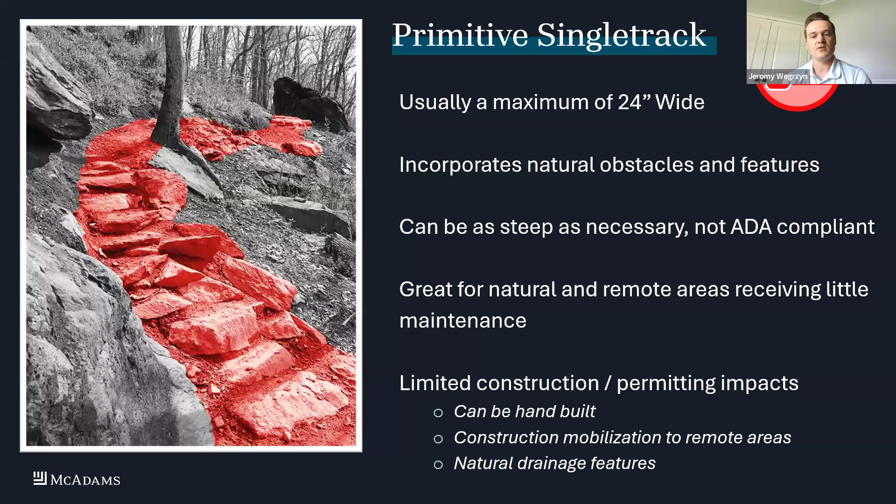So next slide. Contouring single track is our next trail type. These are a little bit wider than some of our primitive trails, about 2 to 3 feet wide and clear of most of our major natural features and obstacles on the shoulders.

You can think of this trail type as catering more towards a wider range of users, including hikers, joggers, mountain bikers, or sometimes equestrian uses. But these can still be relatively steep, with grades of up to 12% or so for some short stretches.

These trails fall into having received infrequent maintenance from groups. If they are maintained, often smaller advocacy groups are mobilized to take on that responsibility, or in large part it can be a volunteer organization. They have light construction and permitting impacts, typically using small scale grading equipment to create or maintain them. But the advantage is that they're still able to be implemented in more remote areas.

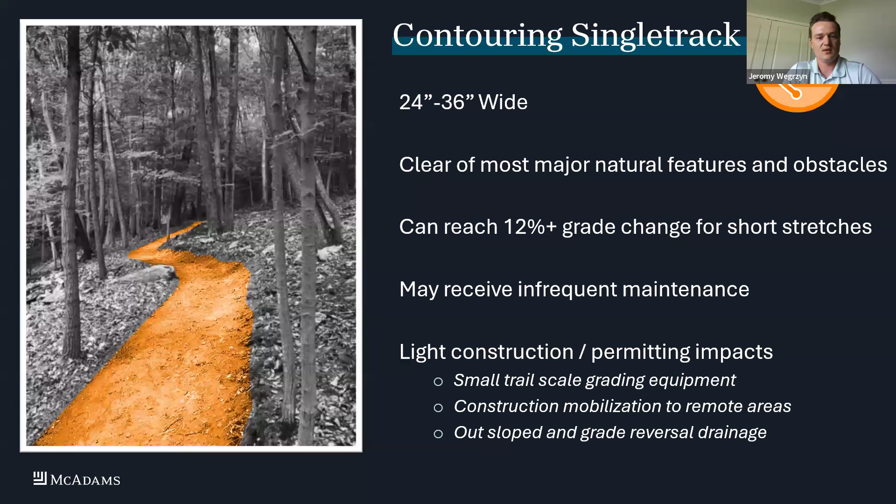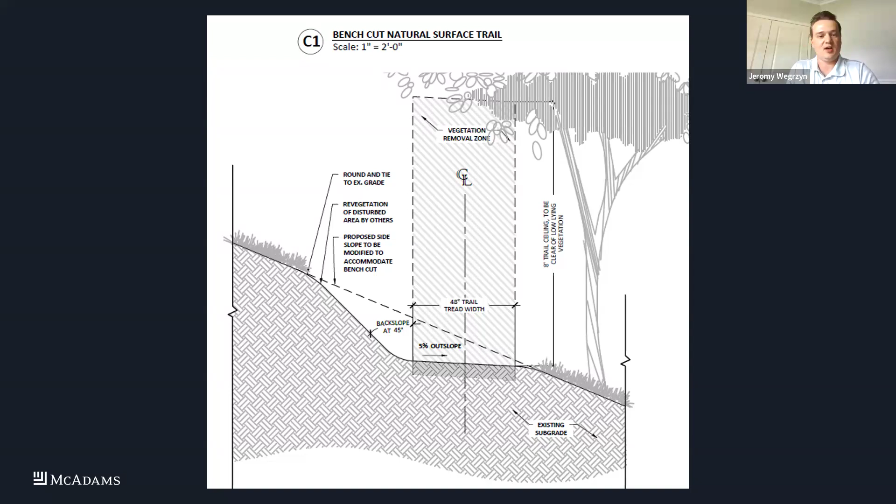This is kind of a shameless plug for one of the cross sections we did on a construction project, but it's a typical section for a natural surface trail, showing things like the trail width, the center line, and additional information such as back sloping, the proposed grade to tie into the existing grade, and notes including limits of vegetation clearing. We like to make sure vegetation is cleared along the shoulders as well as up into the tree canopy.

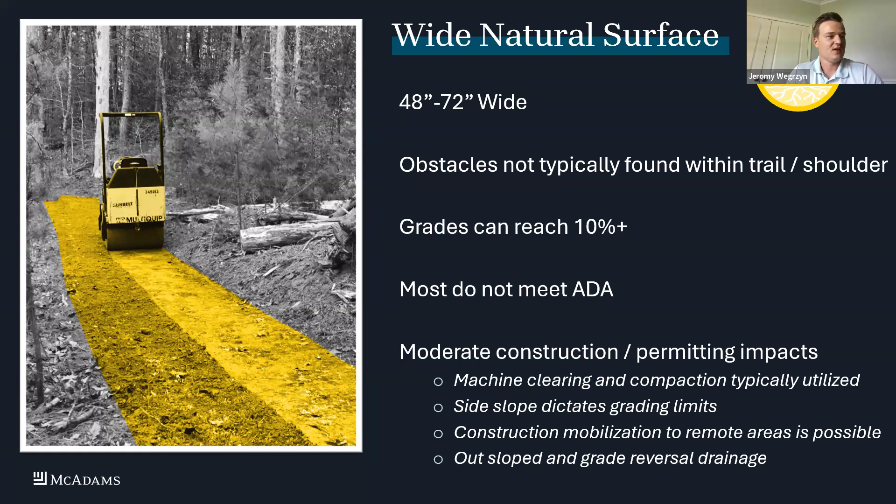Next we'll talk about wide natural surface trails. These are typically machine graded and compacted using larger equipment. They still won't meet ADA, but they'll typically have less severe grade slope than your more narrow contouring single track. You use machines to clear and compact these. The side slopes often dictate your grading limits, and construction in remote areas is possible to some degree.

Then we'll move into wide gravel surface trails. These trails are typically 4 to 8 feet wide, with a shoulder and minimal trail obstacles. They can meet ADA and many serve as a good alternative to paved greenway trails. But note they do still require suitable compaction. Materials on these trails will require additional maintenance compared to permanent pavement trails, and compared to wide natural surface trails, they're limited to less remote areas.

These are a good alternative for maybe a suburb or exurb housing development that wants to provide some sort of amenity that may have to meet ADA requirements, but they're interested in or concerned about permanent pavement impacts or cost.

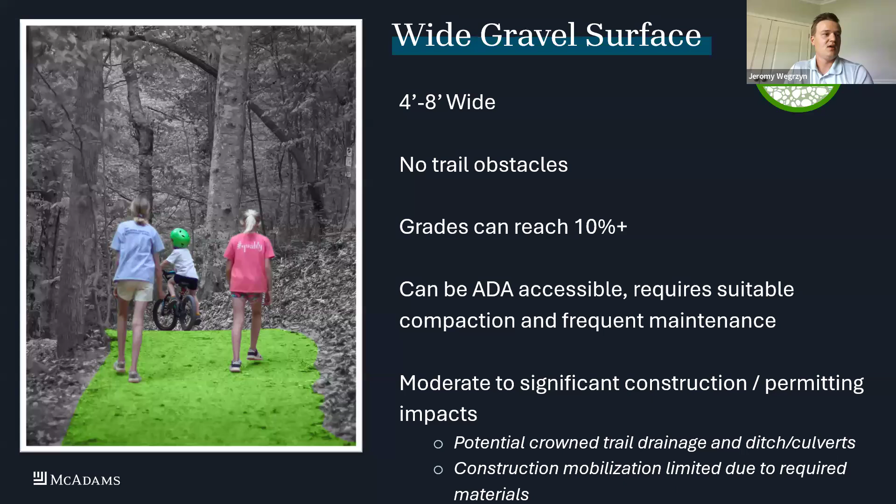This is what a typical section may look like for one of those wide gravel surface trails. You'll typically have a layer of crushed fines underlaid with a stone course, such as 57 wash stone. In this example, we have that whole thing wrapped in a geotextile fabric. This is a good design for an area that receives frequent water inundation, since the stone underneath the trail helps water drain away from the crushed fine surface.

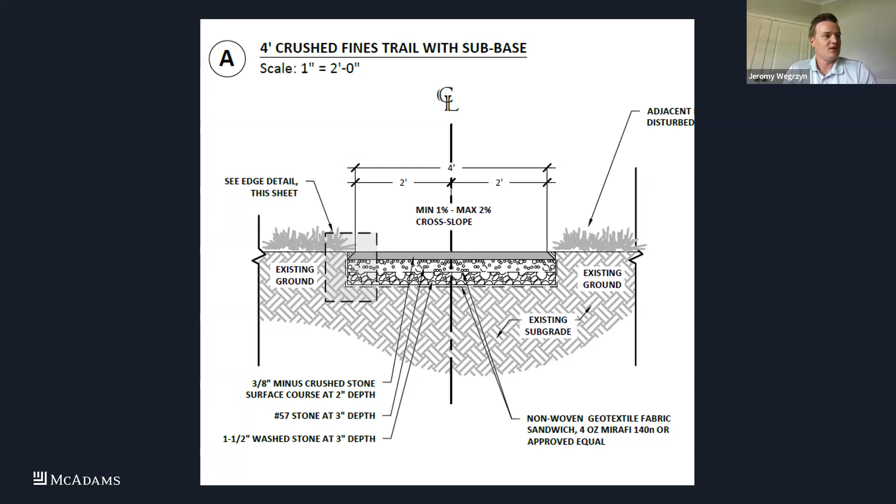Or it could look something like this, where we have a crown slope where water is draining away on either side of the trail, with 57 stone sunk underneath that crushed fine section, still wrapped in a geotextile fabric. But this section and trail type would be something you'd see in an area that's a little less prone to stormwater inundation.

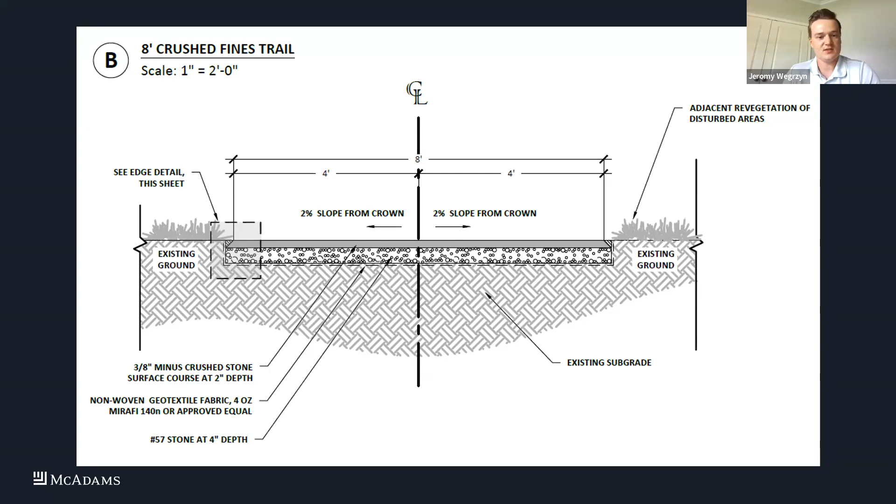So that was the first four — natural surface and wide gravel surface trails. I'd like to move into some of the next four that are commonly seen within our developed urbanized areas. But as mentioned, that's not entirely the case, and that's one of the points we'll be making later in this presentation.

The next couple we'll go over are side paths. These have significant planning, permitting, and stormwater construction impacts. As anyone who's implemented retrofitting a sidewalk will tell you, they're typically 8 to 12 feet wide, can have a buffer, and typically follow an existing or proposed roadway. They can be made of materials such as asphalt or concrete, following typical ADA compliant grades. These may necessitate a design consultant for design and permitting. Mobilization is limited due to the materials used — it's harder to get concrete or asphalt further away from a construction access point, so these trails are limited by that factor.

Large scale drainage system modifications and urban stormwater evaluations need to be done. Right-of-way acquisition may need to be looked at. Things like utility relocates and driveway replacements are common with these types of facilities.

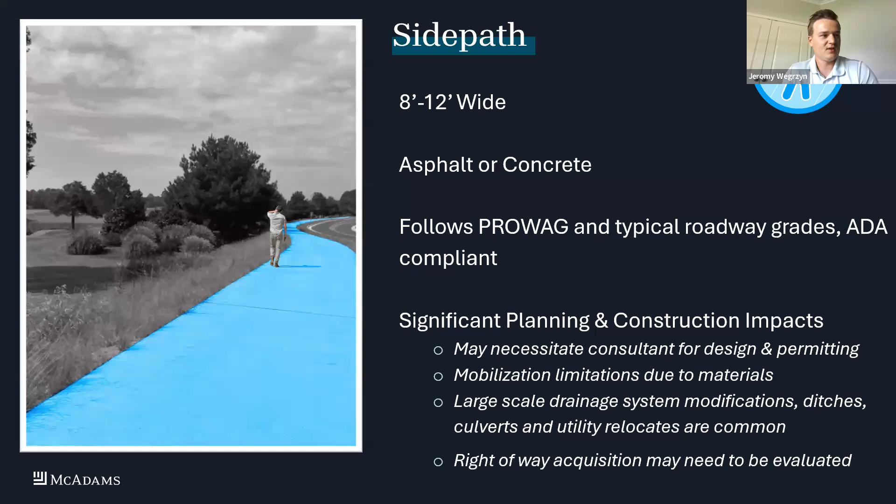Our greenway trails, since they don't typically follow roadways, can be a little bit wider. Often they're less constrained when it comes to the utility relocates and driveway replacements I just mentioned. Grading them can still be difficult, but they're also a little more forgiving than wedging a side path along an existing roadway.

Typically these will be designed with outdoor accessibility standards in mind in terms of grades. So if you've master planned these and they're located along an urbanized stream corridor, it may be beneficial to pair these with a stream restoration project to combine permitting and any floodway mapping revisions.

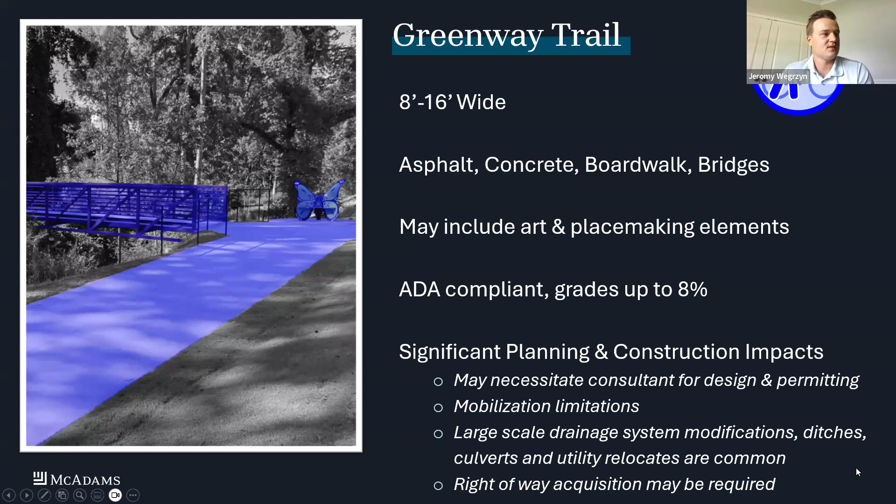As far as the section goes, we typically have a flexible pavement surface as asphalt or maybe even a concrete on top of an aggregate base course and compacted subgrade. This example shows a gravel shoulder, which might actually be beneficial for runners or gravel bikers. But the intent is to also provide some level of separation between the pavement edge and where that proposed grade is tying back down into existing grade.

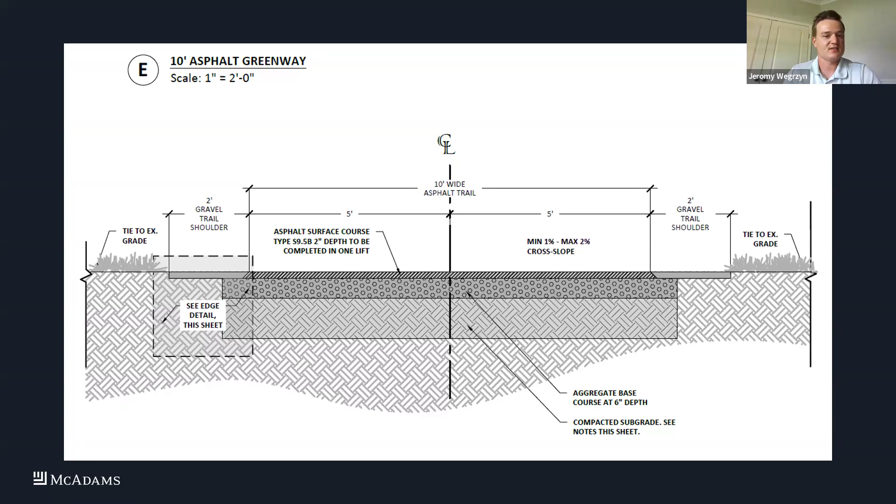All right, next slide.

So last one I'd like to cover in terms of pavement, separated bikeways and sidewalks. These can be 16 to 26 feet wide. This particular photo is taken in Charlotte. These are asphalt, concrete. They separate our modes of travel, right? So you see your bikes operating side by side, and then pedestrians either grade separated or horizontally separated.

But these typically follow streets and are subject to processes that take years and years of planning and design, and those types of considerations to fully implement.

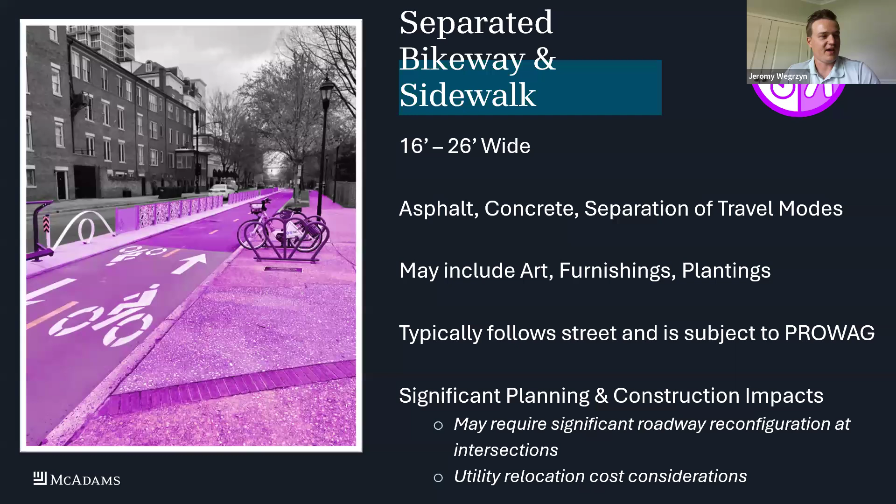But with that, I'd like to turn it back over - I guess there's a couple more slides here. So as we've kind of noted earlier, I would kind of then separate these into two different categories.

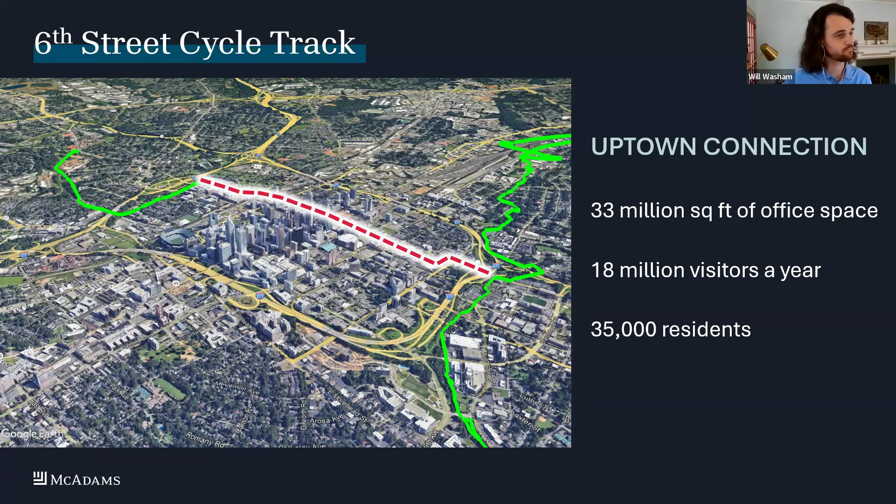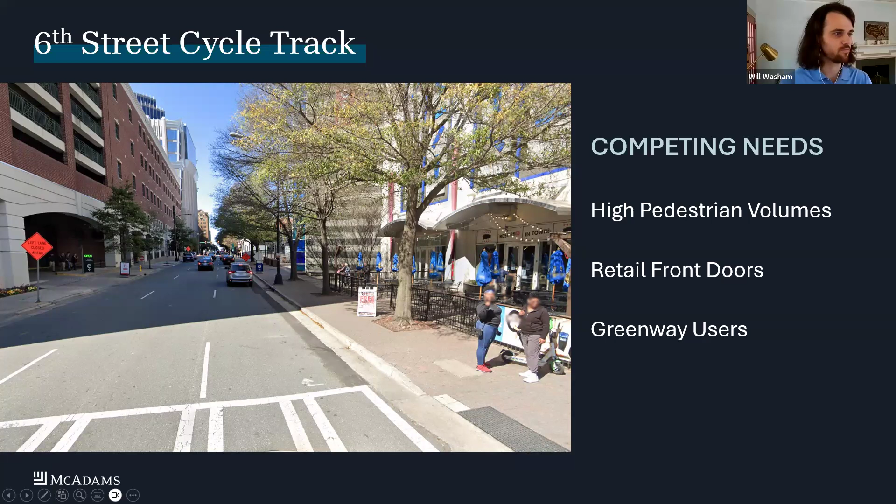Once you get into Uptown, there's a lot of competing needs. There's high pedestrian volumes, retail front doors. You've got folks coming in and out of offices, shops. So how do greenway users fit in to all these competing needs within the streetscape of Uptown Charlotte?

Definitely took some planning to figure out how we're going to get greenway users into that fabric. As I mentioned, I was with CDOT from 2018 to 2022, which was really the meat of design and construction for this project. But the planning was really done in 2016 and 2017 through the Uptown Connect study. If you're interested in urban planning, transportation, traffic planning, this was a very comprehensive study, really a groundbreaking study, I think, for North Carolina, where it evaluated all of the 35 corridors east-west across uptown Charlotte.

The study sought to figure out where we can add this greenway connector, because we'd have to take something away. We're not taking the sidewalks away because there's way too many pedestrians in uptown. It's a pedestrian-oriented development pattern. So we need to figure out where we can take some space from cars and give it to bikes to get that full trail user experience.

And so out of that study and out of all that traffic evaluation, there were 4 corridors recommended to be a network to provide greenway users connections into and through uptown, with 6th Street being the first corridor for implementation.

So when we were thinking about the design considerations for this project, we wanted to match the greenway comfort. This needed to be a fully separated facility, and we needed to have space for the high volumes of bicyclists and pedestrians. We really had to take into account traffic signal phasing. We were going to have riders going counterflow along 6th Street. It's a one-way street, so we had to look at the traffic signal phasing, and we also had to look at the turning movements. We had high volumes of cars, especially during the AM and PM peaks, turning across what would be this future cycle track.

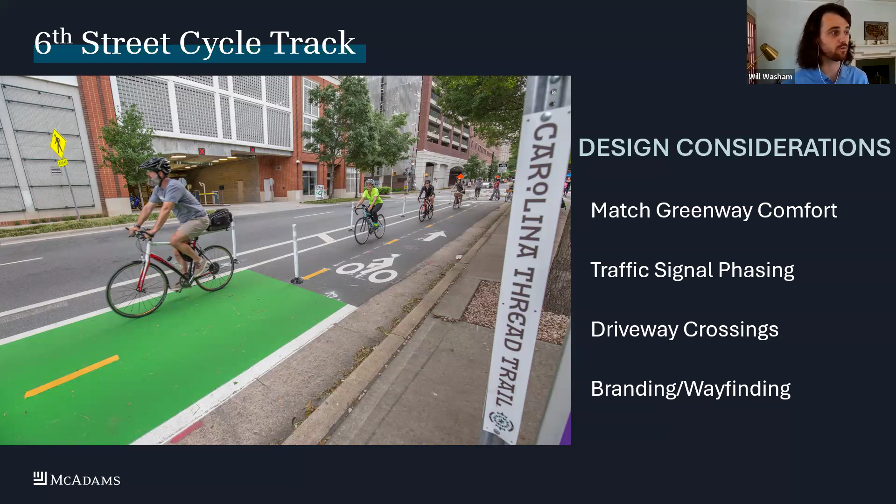This is a portion of the Carolina Thread Trail in Mecklenburg County. And what you see, the photo on the left, this was actually our pilot project. So this was early implementation. This is not the final configuration, but this was a really important step for us to bring city leaders along as this project came to life.

It was over a $7 million project and a 2.5-mile separated bikeway that looks just like this. We also reconfigured every ADA curb ramp along this corridor, which added a good bit of cost to the project. It was really a learning experience - we didn't realize we were going to trip all the PROWAG regulations to retrofit all those curb ramps. So it was an ADA project as much as it was a trail and bikeway project.

For all that, we got one amazing connection that was 7 years in the making. Did it have to take that long? Well, no, it really didn't. Now, it was a big challenge because it was the first major separated bikeway project in Charlotte, really one of the first in North Carolina. So there were a lot of firsts, a lot of lessons learned, a lot of bringing business leaders, city leaders, and citizens along for the ride.

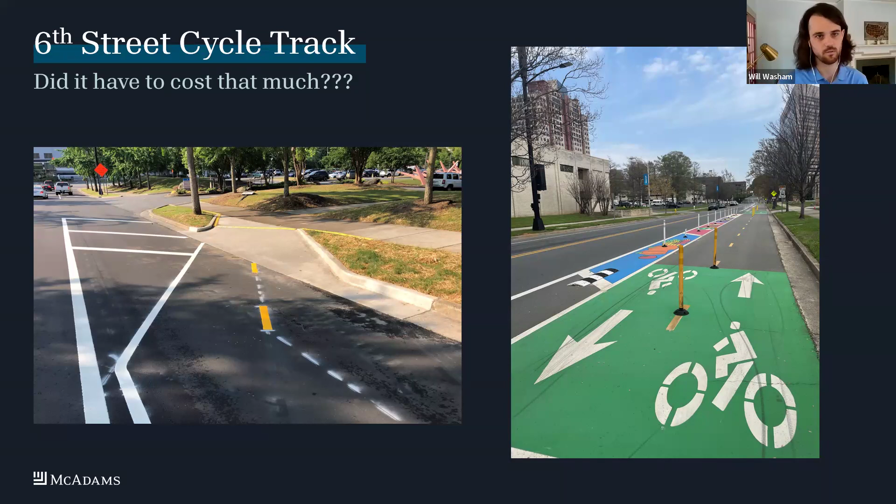These aren't just for the big city. Implementing cycle tracks as a part of your trail project can be something you want to look into in your community, especially as we have so many trails getting closer and closer to our North Carolina Main Street towns. Cycle tracks are a great way to get folks biking on your greenway into your downtown without clogging up the sidewalks. So quickly wanted to touch on the Ecusta Trail in Hendersonville, North Carolina.

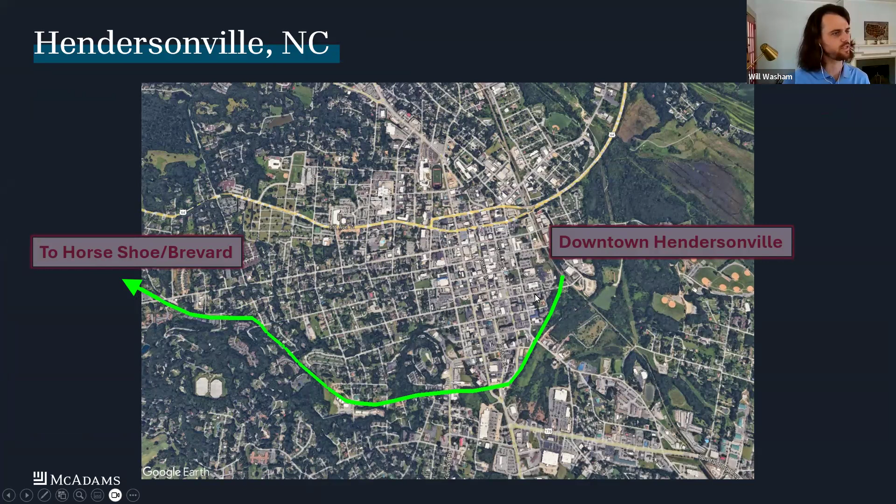Annotated here on this map, the Ecusta Trail as it comes into downtown Hendersonville. Hendersonville is in the middle of your screen, and you can see that traditional urban block style as you get into downtown. So the Ecusta Trail - it's so close yet so far. As it currently sat before this South Main Street cycle track project, for trail users to get into downtown, experience the restaurants, the shops, the activities - there was sidewalk connectivity, but there really wasn't a great intuitive way for bicyclists to get from the trail into downtown.

There was the subject section of the South Main Street Cycle Track project, and then of course you can see the urban core of Hendersonville.

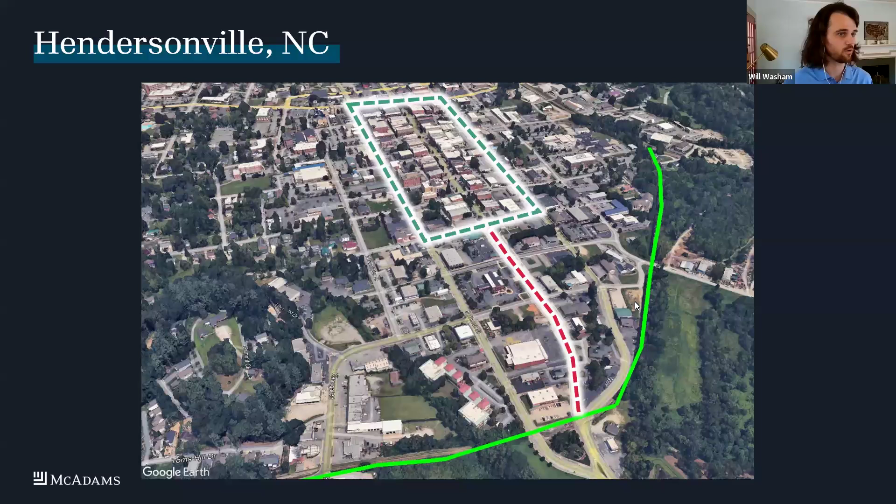So here's a photo on the left of construction of the project on that South Main Street corridor, and this was actually designed by our McAdams colleagues in our Asheville office. They were part of TPD, Traffic Planning and Design, when they did this project, but they've since come onto our team. We're so happy to have them.

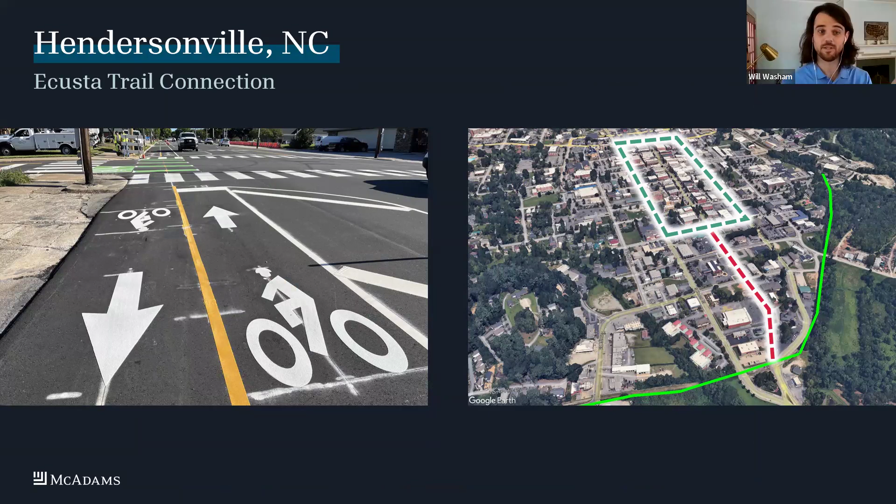There was a legacy volunteer-built trail network that supported mountain biking and some hiking that existed on this property, but it became the focus for some more investment and community-led improvements.

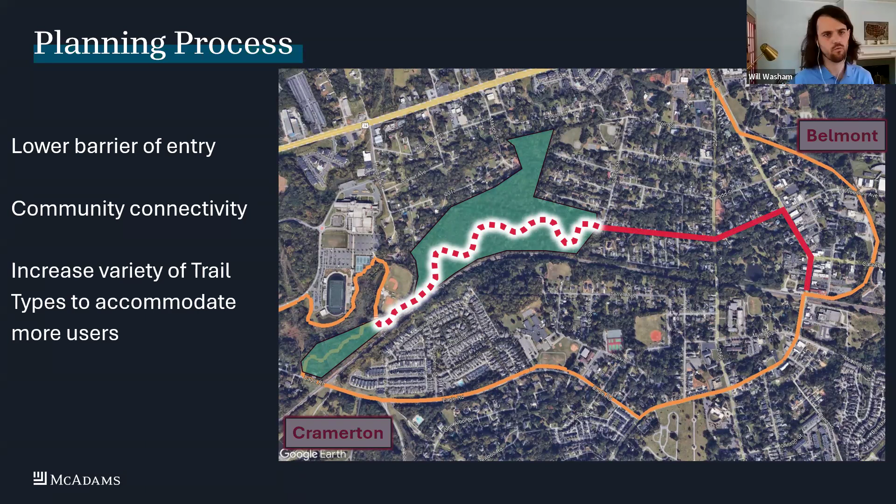And here's that connectivity being brought in, with downtown Belmont on the right-hand side of your screen. The solid red line is sidewalks and very low volume neighborhood streets that take you right from historic Belmont—from the restaurants and the shops, including a great bike shop downtown, South Main Cycles—directly to the entrance of Rocky Branch Park. Then there's that future connectivity through the park that would become the Carolina Thread Trail.

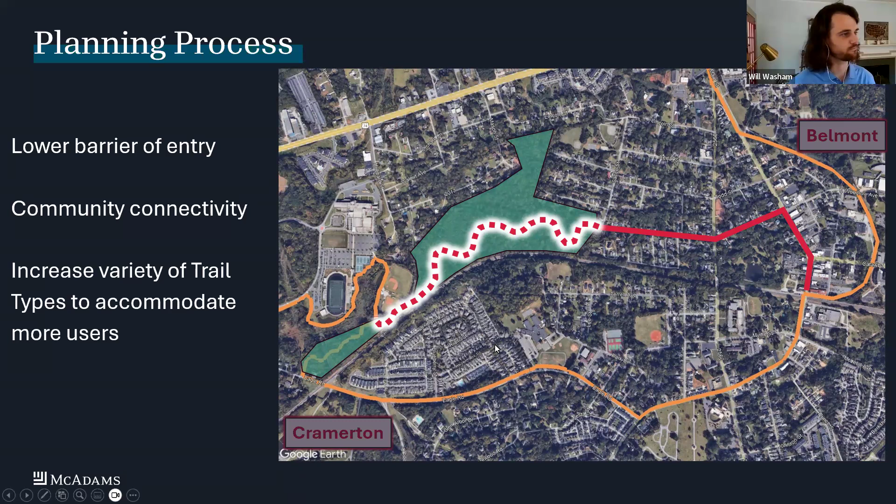The master plan proposed a gravel surface trail to provide connectivity between the two towns, serving kind of as a pseudo greenway. It integrated really well into the trail network with that trail type. There was less grading and clearing required, so we were able to maintain more tree canopy, and it was much more friendly to the project budget, given this specific context for Rocky Branch Park, rather than a paved greenway trail.

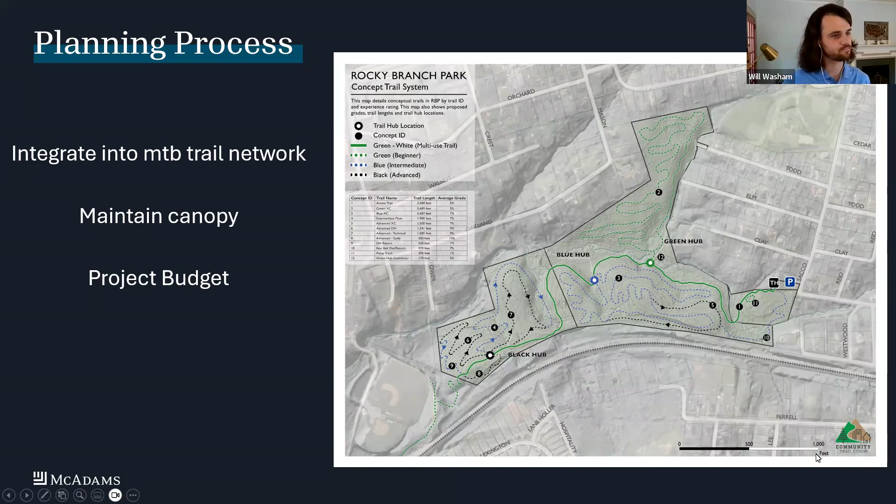So this directly fits into that gravel surface trail type that Jeromy went over earlier, and it does vary a little between 4 and 8 feet wide based on some of the conditions and terrain. As I mentioned, we wanted to minimize clearing, so there are a couple spots where it necks down to 4 feet, but it gets up to 8 feet wide in many spots. It's capped with crushed aggregate for all-weather use. It is not ADA compliant because of the terrain variations, but we were able to achieve our goal of limiting construction impacts.

What's unique about this trail type, and why it fits in really well to Rocky Branch Park, is that this crushed aggregate trail was constructed with the same kind of machines used to build the mountain bike single track. I failed to mention earlier that, in addition to providing this connectivity, the Rocky Branch Park project also redesigned all of the mountain bike trails in the park.

There are now 3 progressive loops for beginners, intermediates, and advanced riders. The construction contractor was Nature Trails, a North Carolina-based company, and they were able to use similar equipment to what they were using for the mountain bike trails. This makes it really affordable and opens up a whole new range of contractors to implement these kinds of trails, aside from your traditional, heavier contractors that build greenways with paved surfaces.

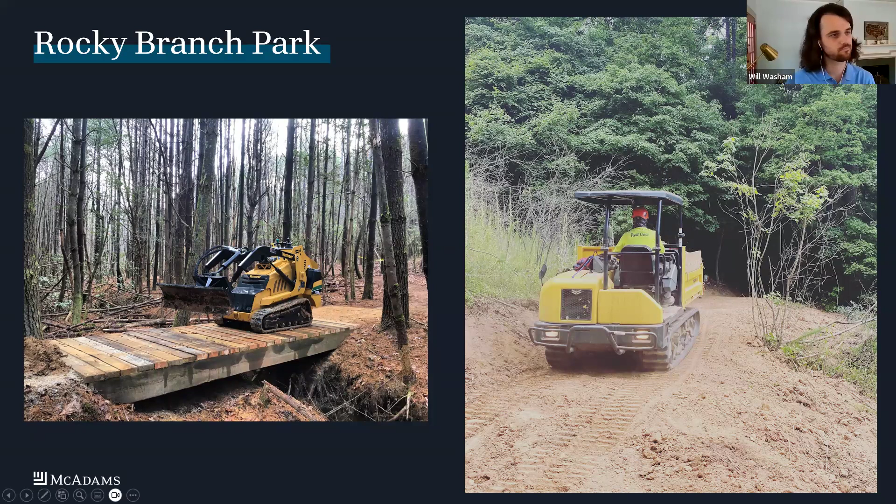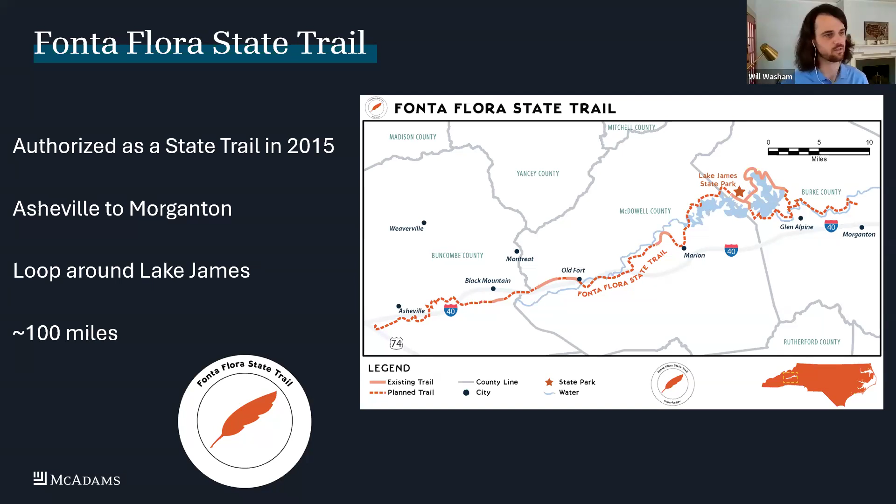The map on the screen shows the completed sections in the solid line, and the sections still in planning stages in dashed lines. We've got a number of different trail types along the Fonta Flora State Trail. We're going to cover sections that are paved greenway, concrete side path, wide natural surface, and contouring single track.

For the paved section, we're going to go to Marion and the Joseph McDowell Historical Catawba Greenway. This is your classic paved greenway trail type. It's a few miles outside of Marion, so it's kind of in this sweet spot between an urbanized area and moving a little more into rural and backcountry settings. This is a great greenway trail, just about 2 miles.

Connecting to the Joseph McDowell Historical Catawba Greenway in the future will be the North Main Street side path, connecting that greenway into downtown Marion.

This was a project McAdams was able to work on as a feasibility study in 2022. That was prior to my time at McAdams, and don't quote me 100%, but I believe this study was funded by the Paved Trails Feasibility Study Program through the state of North Carolina. So I wanted to throw that context out for this group.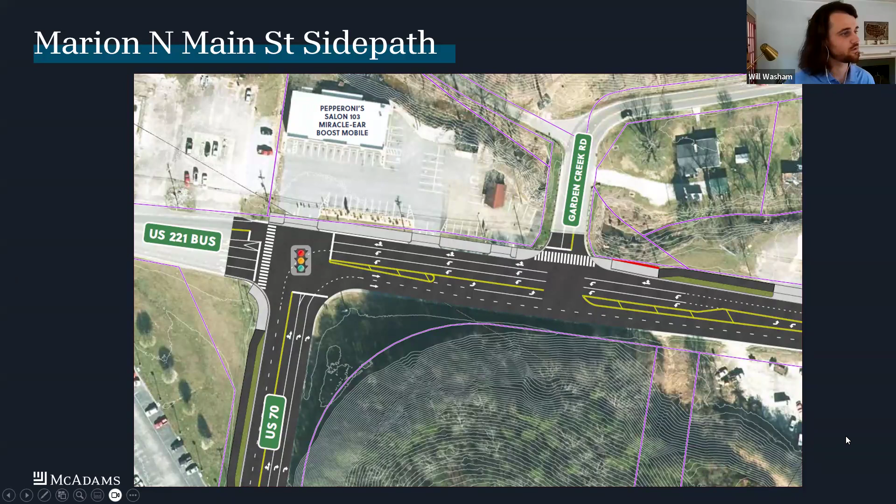A couple more of the concepts. You'll notice the topography on the south side of the street here. That was one of the big driving factors to have this shared use path aligned on the north side of the street, although there were driveway crossings, so I'm sure that was part of the trade-off decision. The driveway crossings are maybe mid-volume, not extremely high volume. We're not crossing the driveway of a Walmart or a Target. So yes, it's not ideal, but the topography on the south side was really prohibitive for locating a shared use path.

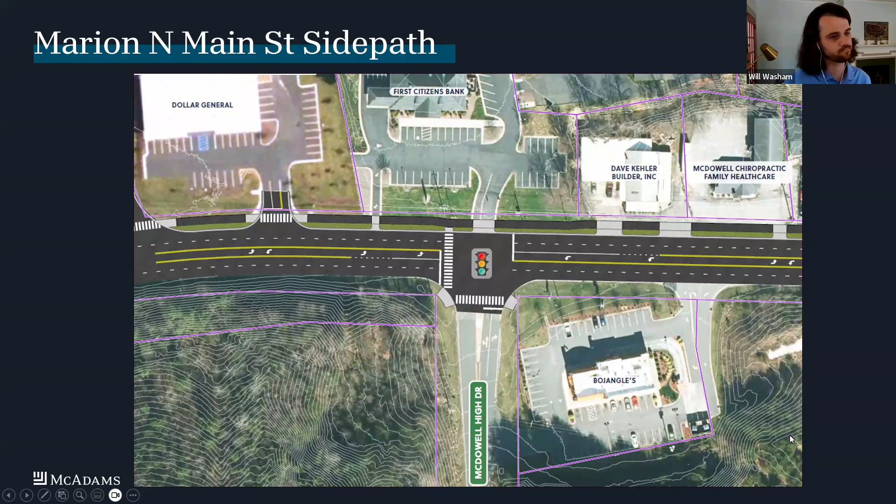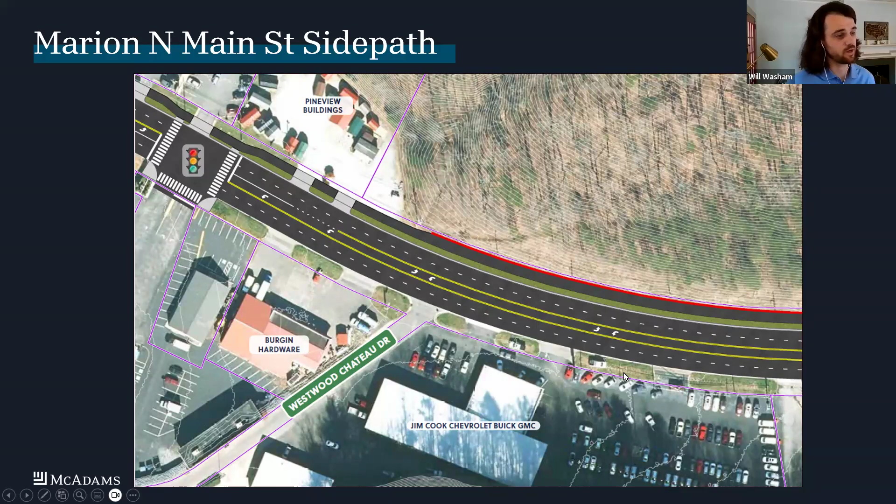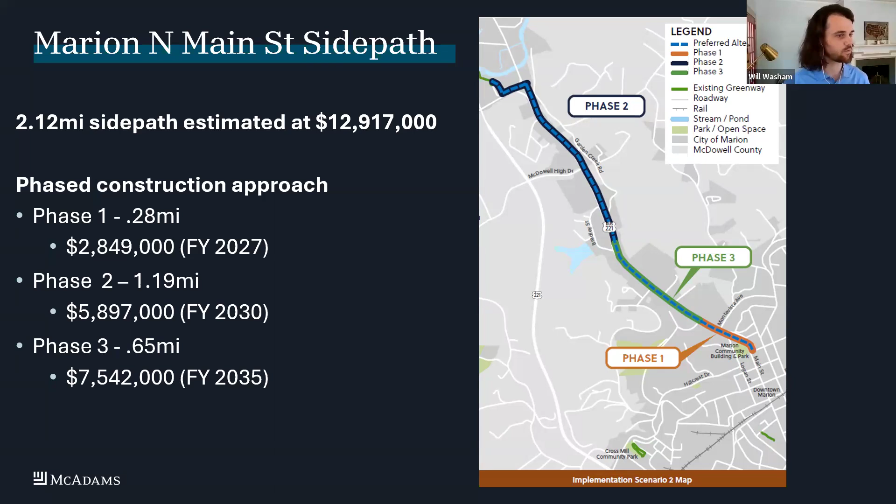Next we'll look at some wide natural surface trail on the Fonta Flora at Lake James, at Fonta Flora County Park. Such an awesome park—our friends at Destination by Design designed this project, got to give them a shout out. And a college roommate of mine, Mike Thomas from Terra Tech Trails, actually constructed the natural surface trails here, so thanks to Mike for some of these photos. You've got access to 18 miles of the Fonta Flora Trail at this park, connectivity to Lake James State Park through natural surface trails. There's parking, restrooms, and access to the lake as well.

This county park features the wide natural surface trail type, giving you a 5 to 6 foot wide trail tread. I think it's really unique—it's all natural surface. This is a photo from construction by Terra Tech Trails; it was a mini excavator constructed trail, but he brought in a mini steamroller for compaction. So there are limited obstacles found within the trail and on the shoulder, and it's really accessible for a lot of user groups. I've got more slides on that, but it was just perfect context for this trail type to get a lot of people out to enjoy the trails while also reducing the cost.

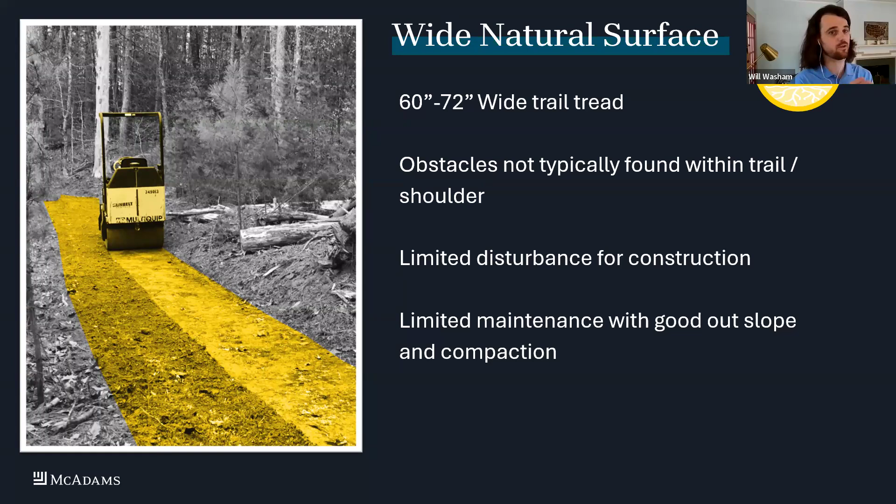Here's some photos—I took these last year prior to the conference. This trail is 6 years old and has received very minimal maintenance, which is a testament to how well you can compact natural surface trails. I actually went out for a bike ride to take these photos, and it's just uncanny how smooth and enjoyable the trail still is after 6 years. The county does do some maintenance out here, obviously clearing trees, but there's been virtually no maintenance to the trail tread at all.

This trail type really covers a lot of the spectrum—it blurs the lines between a single track experience and a greenway experience. You're able to get folks out here for hikes who can't tackle larger backcountry trails, and folks out here on mountain bikes who might not be able to approach traditional steep mountainous terrain, because of the smooth surface here—really everybody in between. We've taken my 2-year-old daughter out here on the shotgun seat; it's actually one of her very first mountain bike trails.

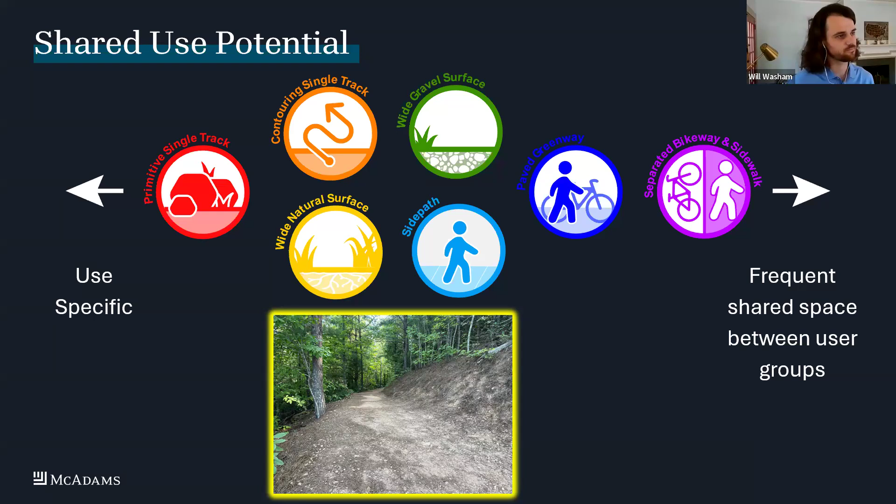This trail type was really flexible. It still had to traverse steep terrain as needed. You can kind of see the grades here in this photo. This section does have some steep grades, and there's still challenging spots - they had to use some switchbacks up steep pitches. That's the great thing about natural surface trails, is they can be flexible, and there were great soil types here, which helps lead to minimal maintenance and high tread resiliency.

As I mentioned earlier, it's a 6-year-old tread built by TerraTech Trails out of Linville, North Carolina, and maintained by Burke County.

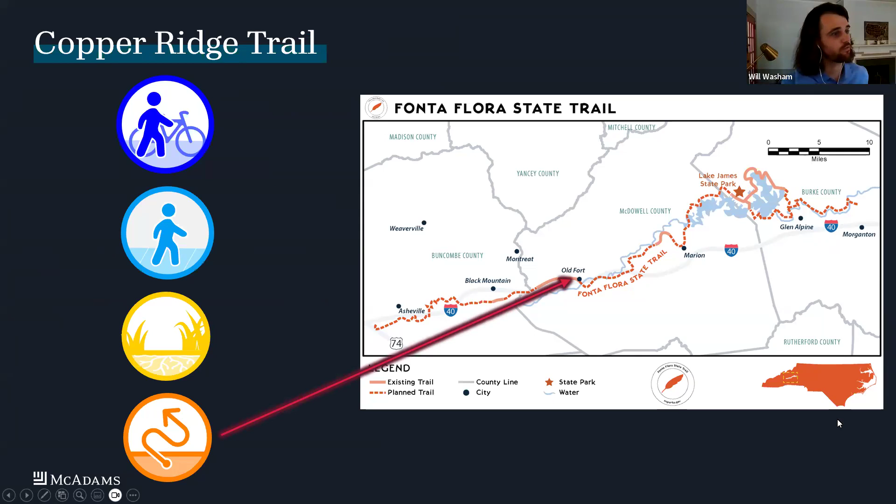And finally, a section of the Fonta Flora Trail in Old Fort, the Copper Ridge Trail. This is a true contouring single track trail section. I know a lot of folks on the call know about the Old Fort Trails Plan - such an awesome project in North Carolina.

It's a community-led initiative. They got a large trail accelerator grant from IMBA, the International Mountain Bicycling Association, to help bring this community's vision to life. They also received $2.5 million in funding from the state of North Carolina to help construct this trail network.

Again, this is a trail type that's very flexible, so it certainly traverses some steep side slopes. It's 2.6 miles long, with 413 feet of elevation gain - some serious terrain here that other trail types would not have been able to traverse. The lowest point is at Mill Creek, 1,600 feet above sea level, and 1,875 feet at the highest elevation point. It provides a great backcountry experience.